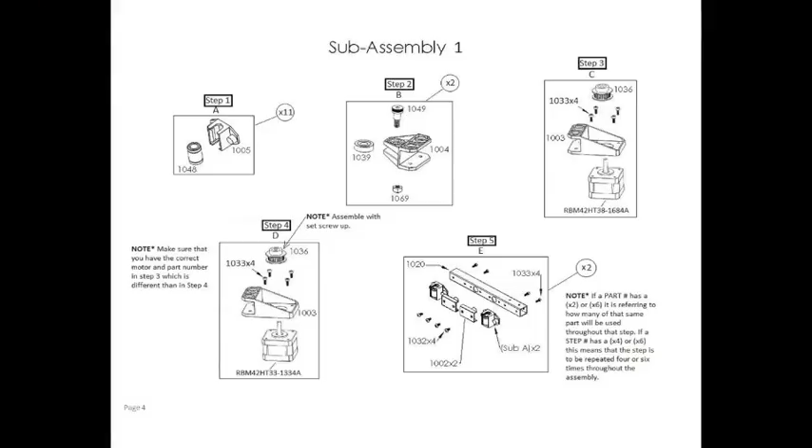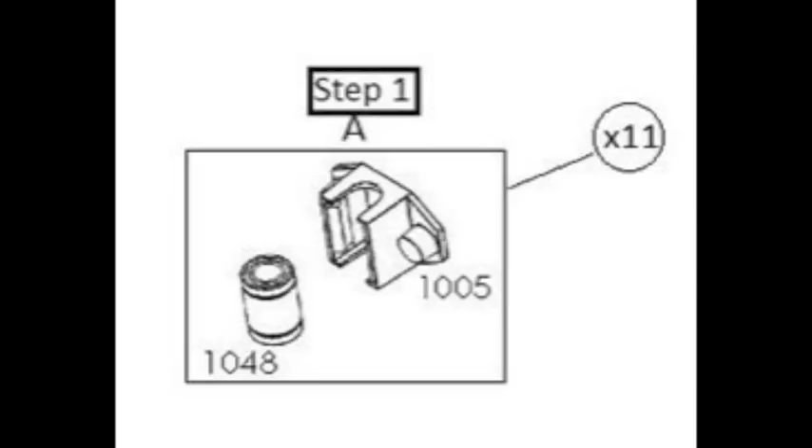For our first subassembly A, we'll take the bearing 1048 and the plastic 1005. You'll snap them together and make sure the bearing goes flush with the plastic.

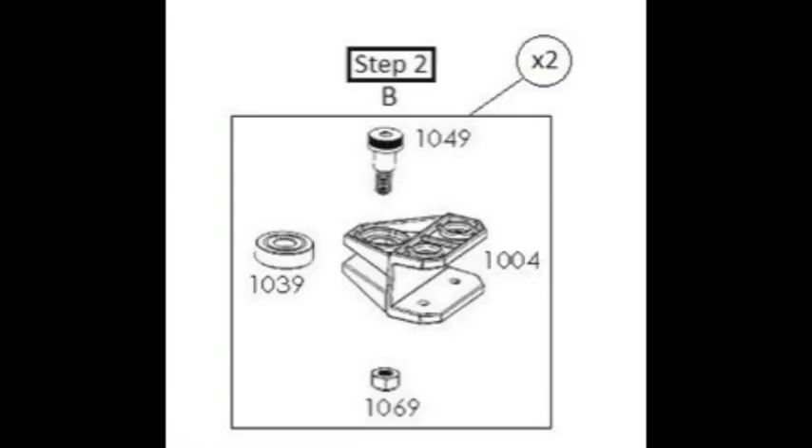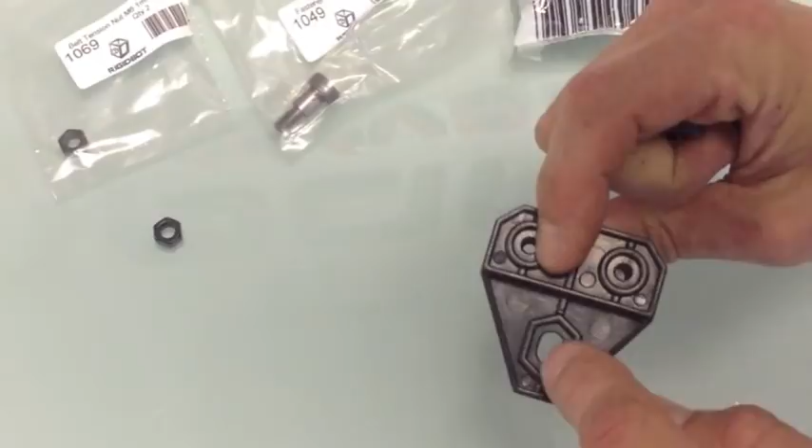Next step is subassembly B. We're going to put together our belt bearing holder. You're going to take your plastic and you're going to want to make sure the nut holder is on the bottom and the Allen head of your screw will be on the top portion.

You're going to want to put it through the bearing and you're just going to want to do it finger tight at this point.

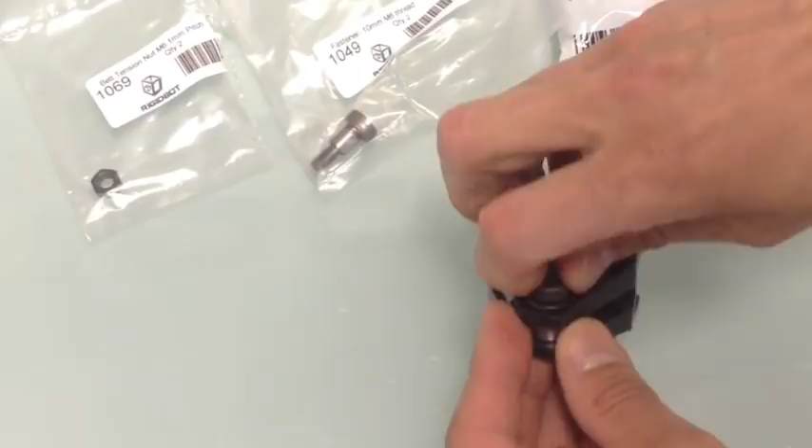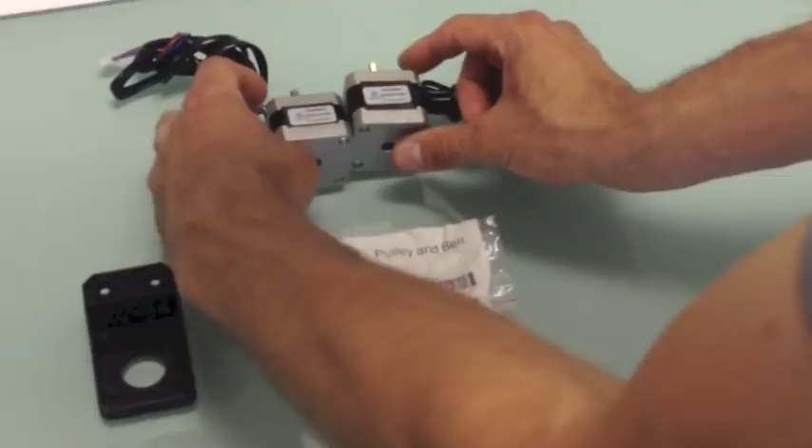Subassembly D, we're going to be putting the motors onto the plastic mounting brackets. You're going to notice that there's two different size motors. There's a taller one and a shorter one, and they're denoted with different part numbers. We're going to take the shorter one for this assembly.

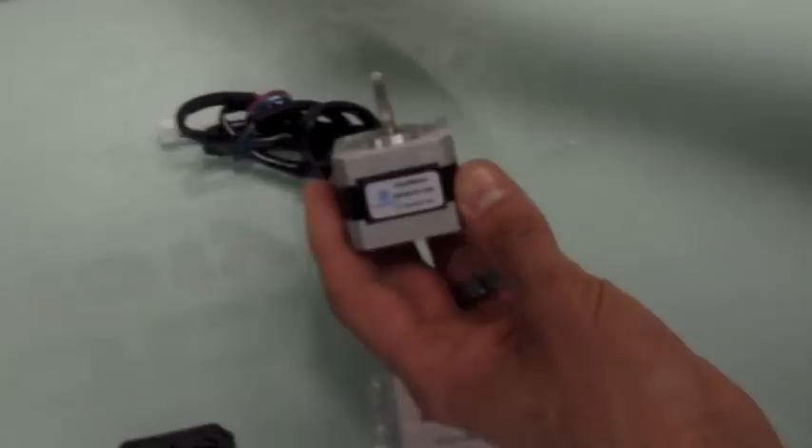We're going to mount it onto our plastic using 4 different bolts, 1033s. You're going to want to make sure that the wiring is facing towards the back.

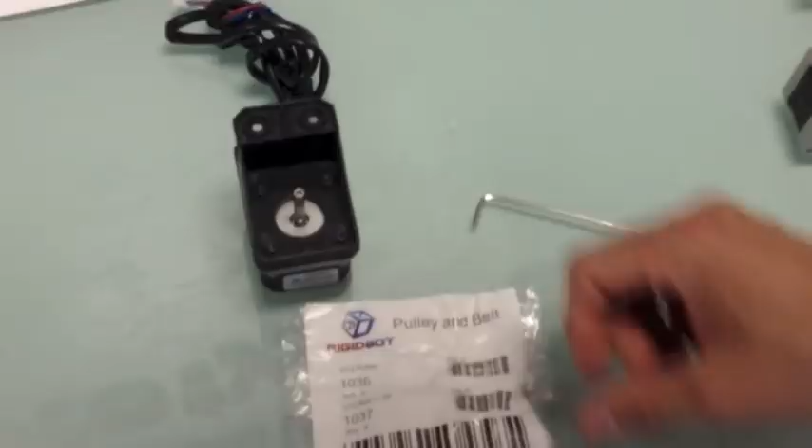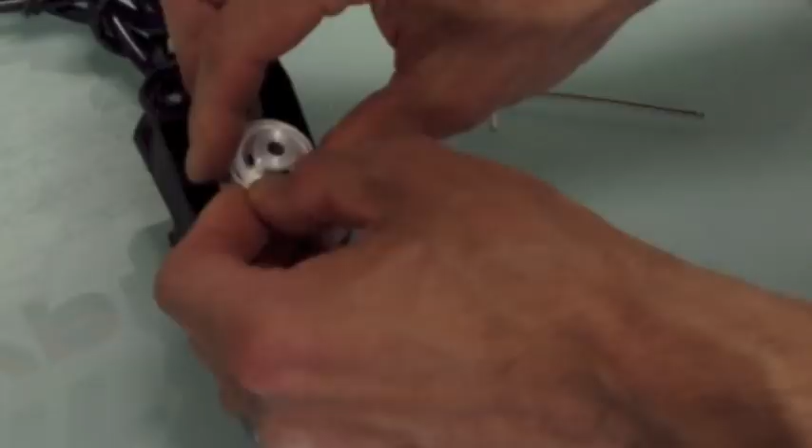You're going to notice on the shaft of the motor there's a flat spot, and you're going to want to actually put one of the set screws directly over that flat spot. You're going to place the pulley over the shaft so that the set screws are on the top portion of the pulley, and you're going to want to mount it flush with the top of the shaft.

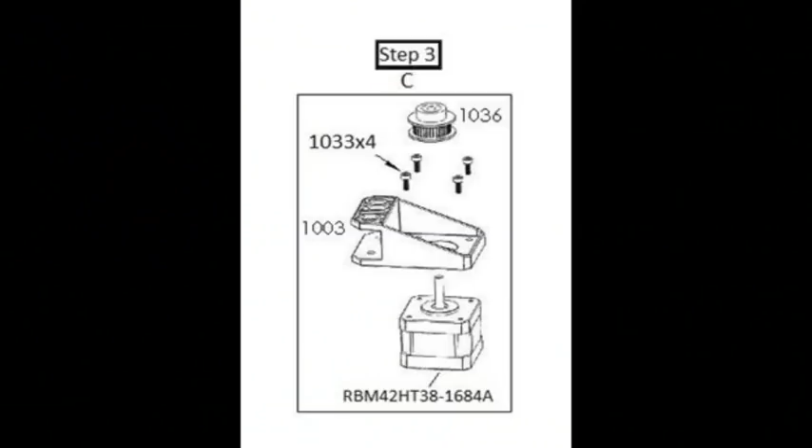Subassembly C is identical to subassembly D, except it has the larger motor.

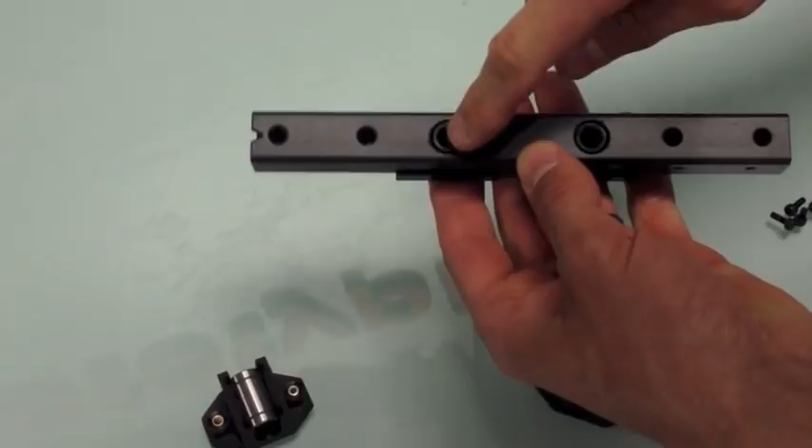Now we're going to mount our bearings, and they're going to go on the same side as the other plastics. And you're going to take your bolts, the 1033s, and you're actually going to go through the back side of the metal bars so that it comes out the top here.